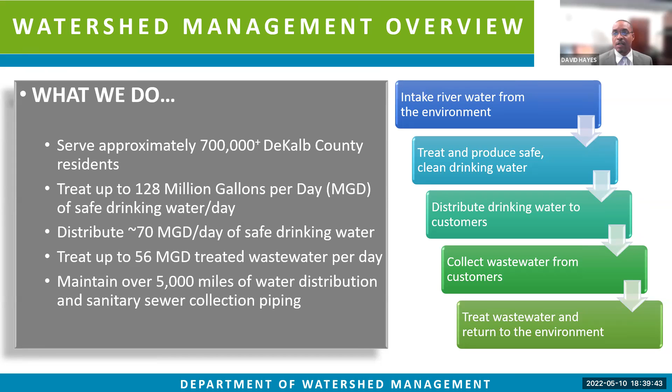Why is the county replacing this water line? Some of the water line here is more than 60 years of age and has by far outlived its designed life. Once we replace this, we will reduce pipe main breaks and improve service, and this will yield a better DeKalb for the future to come.

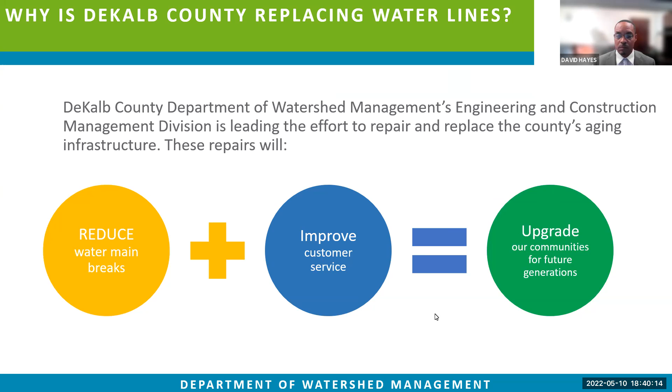To accomplish this task, we've dedicated a full team for this project to include every needed resource from DeKalb County and several industry-leading engineering firms and construction firms who will be led by DeKalb County's own Watershed Management Engineering Department. We're doing this because we know that this will allow a timely, safe, successful project that's going to be on budget.

So from here, we're going to hand off to the program administrator, Ms. Cassandra Marshall. She will tell you a bit about how we've gotten here and what we plan to do to resolve this situation. Ms. Marshall. Thank you, Director Hayes. Good evening. My name is Cassandra Marshall. I am the program administrator for capital improvement projects for Watershed Management. I'm responsible for managing the DWM construction management staff and overseeing the CIP program.

In these next few slides, I will provide an overview of the system problems and our solution to repairing the aging water system. The problem. In the Reindeer area, the county has been faced with 58 water main breaks from 1989 to 2021. We have also had 22 complaints about brown water or low water pressure issues. Brown water is an indication of sediment or rust accumulation in the water main over time. It can also be present after a water main break which stirs up deposits in the system. Therefore, we must thoroughly flush the main after the break or disruption to remove any deposits.

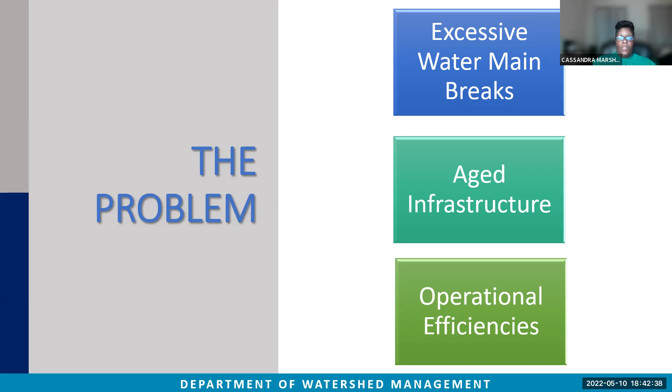The infrastructure in this area is an aged system. This is primarily due to the infrastructure being installed in the 1960s. The pipe material in this area is primarily cement and small quantities of galvanized pipe. The lifespan for this pipe is 60 years and it is at the end of its useful life. The number of pipe failures increases with time and is a good indicator that the pipe is in need of replacement. Next slide.

The county has over 3,000 miles of pipe in the water system to maintain and to provide drinking water to the ratepayers. We also have 4 pressure zones, 21 water storage facilities, 16 pump stations, and 6 pressure regulating stations. As you can see, this is a large system to maintain. Most of the system is aged and cannot be repaired or replaced all at once. Therefore, the county had to develop a best practice way to evaluate and prioritize how and when the piping will be replaced. The first objective was to model the system.

In 2019, the county developed its first hydraulic model. A hydraulic water model is a computer simulation of how the water system behaves. The model can provide a big picture look at how the system should be functioning. For example, it provides details such as system pressures, available water at fire hydrants, and how the water tank level affects the system. Next slide.

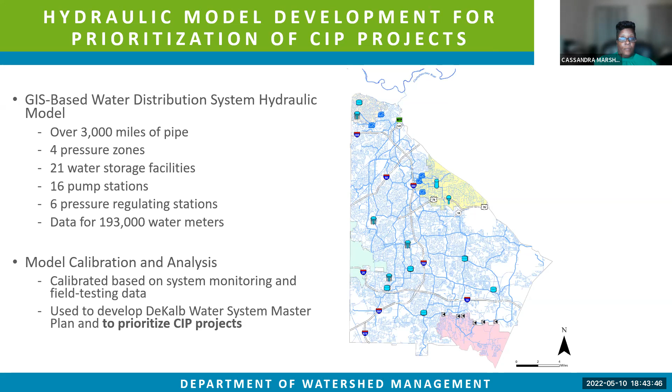Since we cannot replace the aged infrastructure all at one time, we developed a risk-based project prioritization assessment to determine the remaining useful service life of each pipe. This is currently being utilized as a guide to develop a suitable, proactive plan for the distribution system.

Risk prioritization is the process of determining which risk you should act upon first. It is based on the likelihood of a risk and the impact that it would make if the asset fails. During this process, the county analyzed all water mains from sizes 4 inches to 16 inches, which is the entire distribution system. Each water main was assigned a risk score.

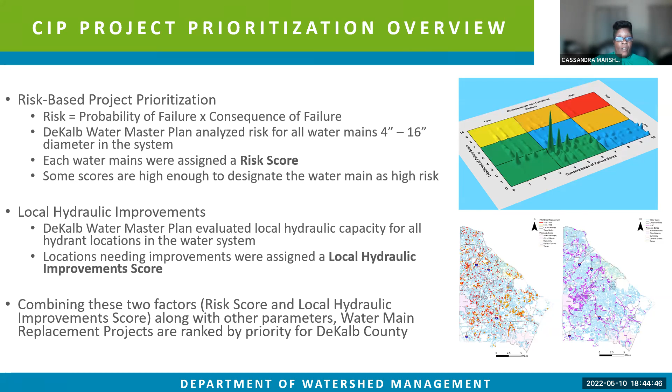In addition, we evaluated local hydraulic capacity for all fire hydrants in the water system. These were also assigned a local hydraulic improvement score. Combining these factors along with other parameters, water main replacement projects were ranked by priority. Next slide.

To this point of the presentation, you've heard about the problem. I will now speak to the solution and the execution of the CIP project. What does CIP stand for? CIP, or Capital Improvement Project, is a project that helps maintain or improve an asset. It can either be new construction, an expansion, renovation, or replacement of an existing infrastructure.

Last year, the Board of Commissioners approved a new CIP program for $2.4 billion for projects to be completed from 2021 to 2030. The Reindeer Water Main Replacement Project is a $10 million project that is included within that plan. My team, the CIP team, is responsible for getting the capital work done. My team includes 4 DWM construction managers and 12 licensed inspectors. Along with in-house staff, we are also supported by consultant firms who help assist the county with construction management and inspection services.

We want you to know that we're here to help. We want to reduce or eliminate emergency repairs. We want to stop the breaks. We want to protect the environment. And finally, after this project is complete, it will improve sustainability to the system. These improvements should last for a minimum of 70+ years. You will now hear from Ms. Tiffany Simpson about the project scope and overview.

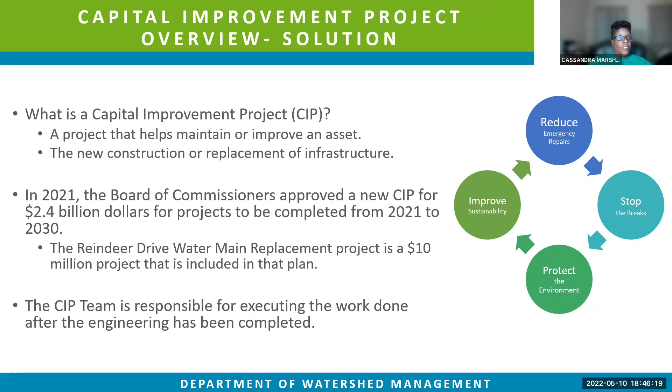Good afternoon, everyone. My name is Tiffany Simpson, and I am the project manager for this project. My role for this project is to work closely with our design consultants during the design phase. Next slide.

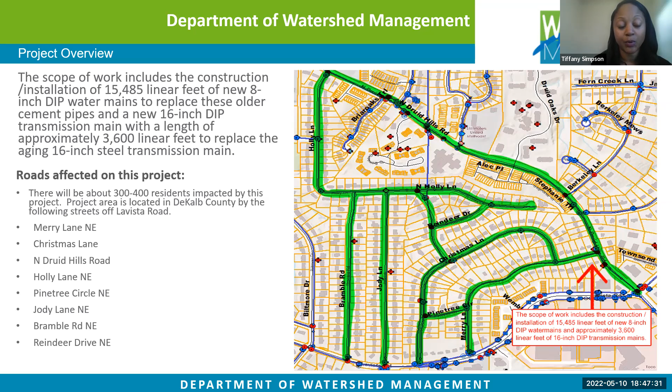Just to give you a bit of an overview, the scope of work includes the construction and installation of a total of about 20,000 linear feet of pipe. That includes a new 8-inch ductile iron pipe and replacing also some 16-inch ductile iron pipe. If you look at the map, it will be impacting about 300 to 400 residents, and it will include the following streets: Merry Lane, Christmas Lane, North Druid Hills, Holly Lane, Pinetree Circle, Jody Lane, Bramble Road, and Reindeer Drive. Next slide.

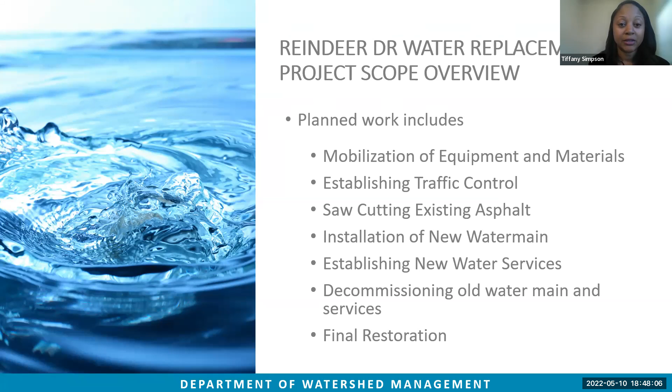Also, some of the work that is planned, you'll see mobilization of equipment and materials. We'll be establishing traffic control, saw cutting of existing asphalt, installation of new water mains, establishing new water services, decommissioning old water mains and services, and then there'll be final restoration. I will hand it back over to Cassandra Marshall, as she will give more detail into the construction aspect of the project.

Thank you, Tiffany. This part of the presentation was supposed to be done by one of my construction managers, Mr. Eduardo Amasquita. However, he is out sick tonight. I will deliver this part of the presentation on his behalf. Mr. Amasquita is one of your primary county contacts. Mr. Amasquita has over 20 years of construction management experience and is a licensed water professional. Next slide.

The method of construction for this project is open cut. We will first come in, saw cut the road. The contractor will begin digging the trench after utilities are located and called in, and we'll start installing the new water main. At the end of the day, the trench will be backfilled. And after all of the pipe work is installed, the contractor will perform a pressure test on the pipe, and then disinfection of the main will occur.

Once disinfection is complete, we will connect all water services to the new main. Asphalt paving will be the last item to be done. This will be done in phases as streets are completed. Next slide.

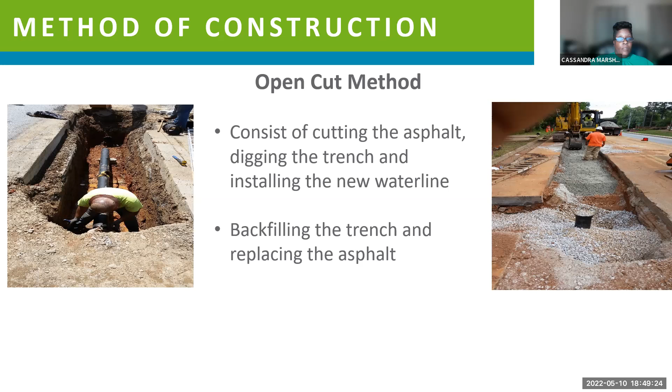The duration of the project is approximately a year. This is a very brief schedule overview of the project. Community notices went out on May 4th. Preparation and mobilization began today by the contractor. The construction is scheduled to start tomorrow.

And final restoration, ending with some paving work, will be April 4th of 2023, with the final construction being done April 20th of 2023. And this is all weather dependent and site condition dependent. Next slide.

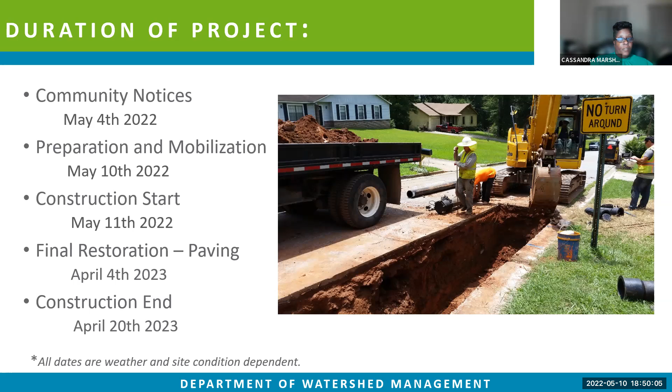So my construction team are the boots on the ground. We're the first line of contact for the project. From the first day of commencement, the DWM inspectors and construction management team will be on site to ensure the construction activities, which include ensuring that erosion and sediment control measures are in place, ensuring that the contractor is installing the pipe according to the contract documents, and ensuring that all safety measures and traffic control measures are being followed. We will also make sure that all trenches and holes are backfilled and secured at the end of the day.

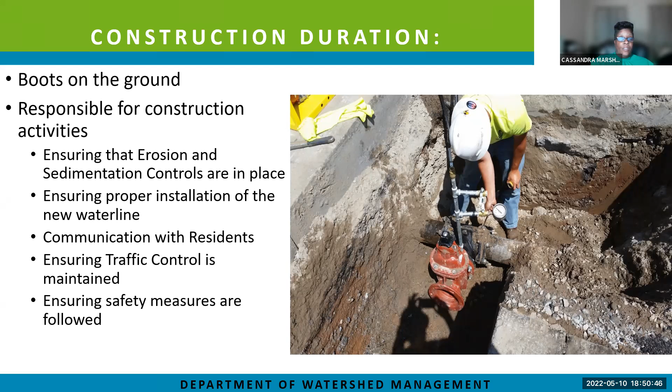Next slide. This slide is a before and after look of what the area is going to look like during construction and after final restoration is complete. The picture to your left depicts a typical construction site or work zone, and the picture to the right depicts the final product after all the work is complete. Paving restoration will only occur on the lane in which the pipe has been installed.

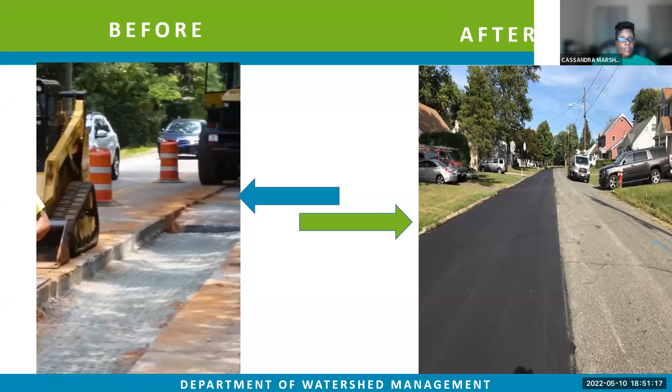Next slide. At this time, I will now address community concerns and what the community should expect. So what to expect? Unfortunately, what comes with construction are inconveniences which we plan to try to minimize. What you're going to see is a lot of construction traffic, foot and vehicles, large dump trucks and heavy equipment. There will be construction workers, county employees, and contracted workers throughout your communities. There will be material and equipment deliveries by means of large tractor trailers. The crews and flaggers will guide these large vehicles in and out of the community.

What also comes with working in the area is the parking issue. There will be vehicles parked alongside the streets and alongside the work zone. Work zones will be delineated by means of orange cones and barrels. In addition, as a security measure, all county contractors and county employees will have an identification badge and marked vehicles. There will be increased noise from the equipment backup alarms, heavy equipment usage, and saw cutting of the asphalt.

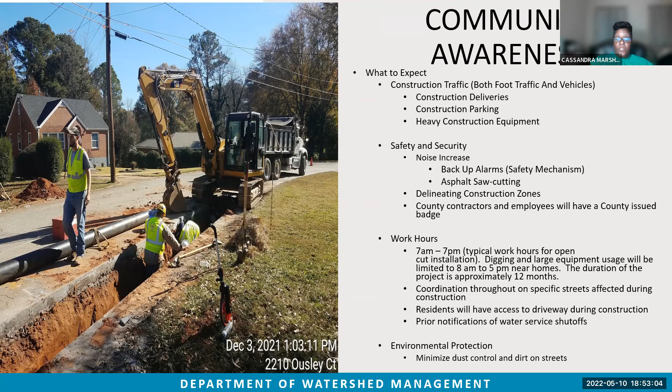Our typical work hours are from 7 a.m. to 7 p.m. Monday through Friday, and sometimes weekends. However, digging and large equipment usage will be limited to 8 to 5 near homes. Residents will have access to their driveway during construction, and notification will be distributed prior to any water service disruption. One last item, you will see silt on the street. If dust or silt is tracked on the streets, the contractor will be responsible for keeping the streets clean and swept daily. Next slide.

The contractor will provide traffic control to guide residents through the construction zone. We will also have a message board, such as the sign shown on the slide, located at the intersection of North Druid Hills and Lavista Road at a minimum of a week before construction begins. You will now hear from Ms. Alicia Penny about public communications.

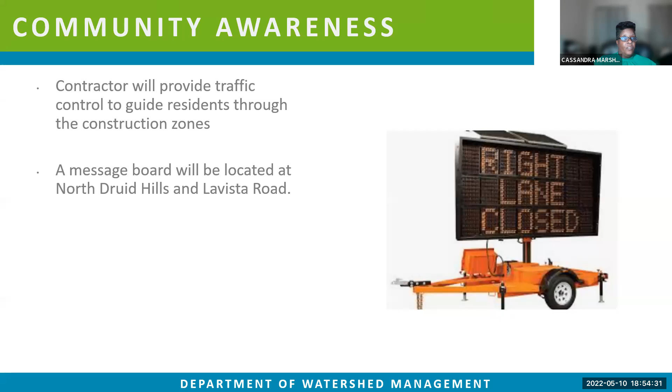So at this point, if you've not done so, would you please take a moment now to provide us with your email address in the chat so that we can capture that information to be used for future communications.